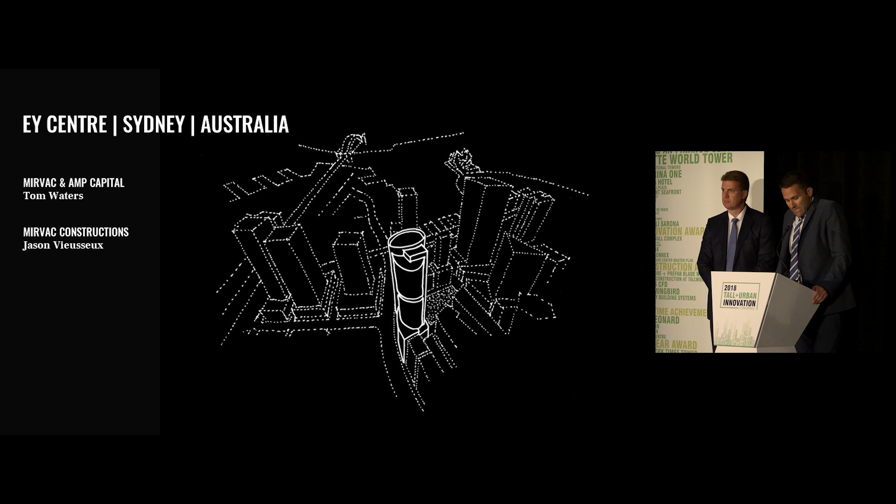I'd like to thank the Council of Tall Buildings and Urban Habitat for hosting the event, but also for recognising the EY Centre in a competition so full of amazing developments. Jason and I are here today to take you through a building we are so very proud of, the EY Centre in Sydney, Australia.

Before we take you on the journey of the EY Centre, I'd like to briefly explain who Mirvac is. Mirvac is an Australian diversified property group. Our primary focus is across office, residential, industrial and retail. We are unique in Australia in that we are the only property group that develops, builds, owns and manages properties across these asset classes. We have an approximate $8.5 billion market capitalisation value. We're publicly listed on the Australian Stock Exchange and have proudly operated in Australia for over 40 years.

Our company was founded on delivering high-quality projects. The concept of quality is as important as ever to us, given we develop, build and then hold on to our assets. The EY Centre is one of these projects and is the jewel in the crown of the 61 major assets that Mirvac Capital own across Australia.

The site of the EY Centre is located in the Circular Quay precinct of Sydney Harbour, one of the most spectacular harbours in the world, and the harbour where the first European settlers weighed anchor and established a colony that would become Sydney.

Interestingly, when you approach the city from the harbour and are facing south, you're greeted with a palette and form which has hard edges, hard material, and is non-personal. Our architect Richard Francis Jones of the firm FJMT says many of our cities are dominated with buildings that resemble unyielding security guards wearing dark suits and reflective sunglasses. They aren't approachable and they certainly aren't personable.

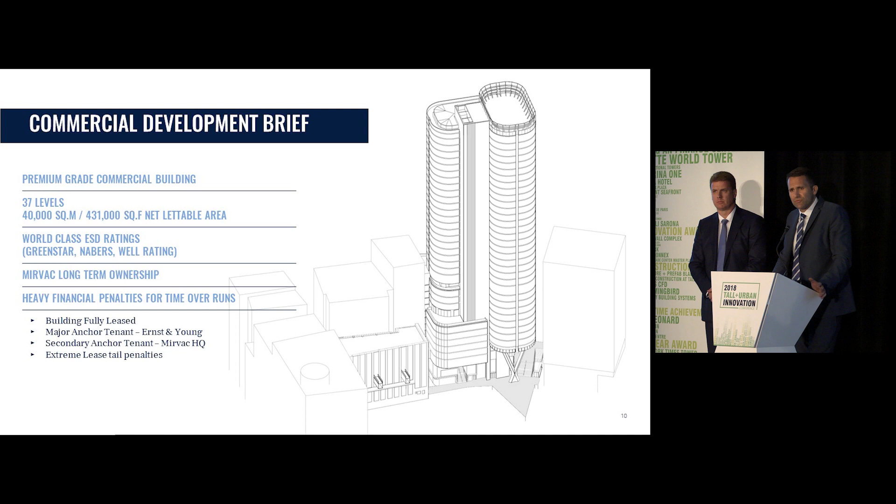And that is why we, as owners, nominated Mirvac Constructions in this category. It wasn't because this building was the biggest—we have height restrictions in the Sydney CBD. It wasn't because it was the fastest—we have working hour restrictions in the CBD.

Mirvac Constructions and the EY Centre were nominated because they delivered a high-rise building more akin to a public piece of art. They did this with craftsmanship and attention to detail in every area, and delivered this artwork within a typical tower duration. This development was delivered in the Mirvac integrated model, bringing the best out of our people across development, design, leasing, and particularly our construction team. I will now hand over to Jason Vieusseux to take you through this artwork on a high-rise scale.

Thank you, Tom, and good afternoon to you all. The brief to Mirvac Constructions was very clear: to reimagine high-rise office as an art form. And we did that through innovation and craftsmanship, but on a high-rise scale.

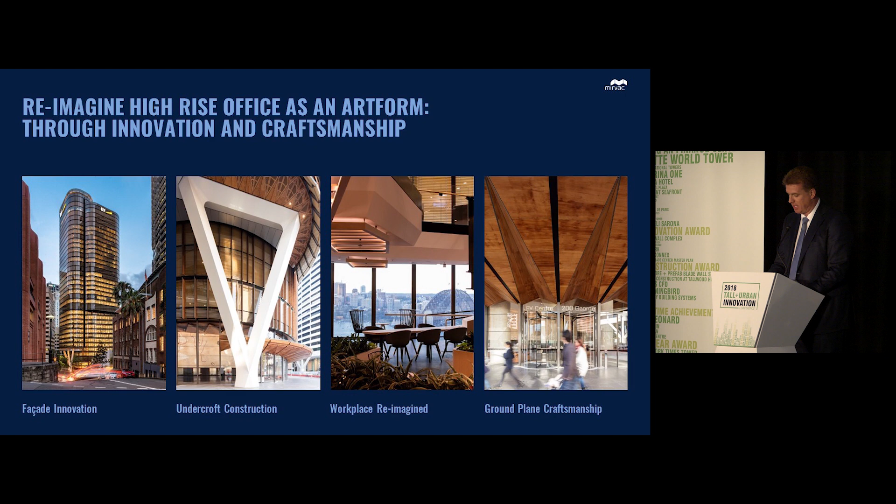The first thing you see at the EY Centre is its iconic high-performance facade. The facade is characterised by a revolutionary use of timber—the first high-rise building in the world to use timber on this scale. There are timber blinds in all of the facade modules, vertical timber fins to the low-rise, and timber-lined mullions throughout the building. And all of this had to be done in Australia, where the climate is hot and presented many challenges in using timber within the facade.

So what is a closed cavity facade, or CCF? CCF is a triple glazed super clear facade consisting of a high transparency DGU to the inner pane and 10mm low iron glass to the outer pane. A conventional mullion depth of 200mm, or just 8 inches, provides a sealed cavity through which is supplied dry dehumidified air, which prevents condensation and the build-up of debris within the cavity. An automated timber blind was used to provide sun shading to the DGU and to prevent glare.

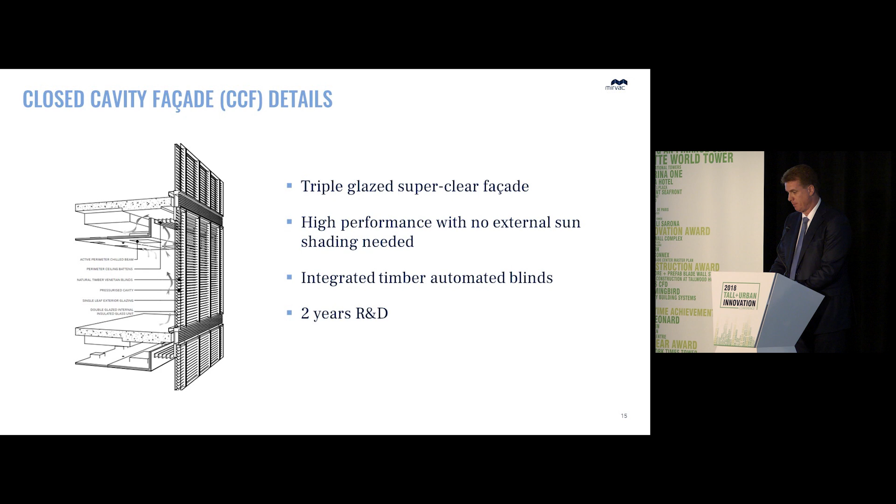Prior to the EY Centre, CCF had only been used on low-rise buildings in Europe and had never been attempted on a high-rise building anywhere in the world. To deliver the CCF, we partnered with international contractor Permasteelisa, and it took us almost two years of exhaustive R&D, which had to be compressed using accelerated testing regimes.

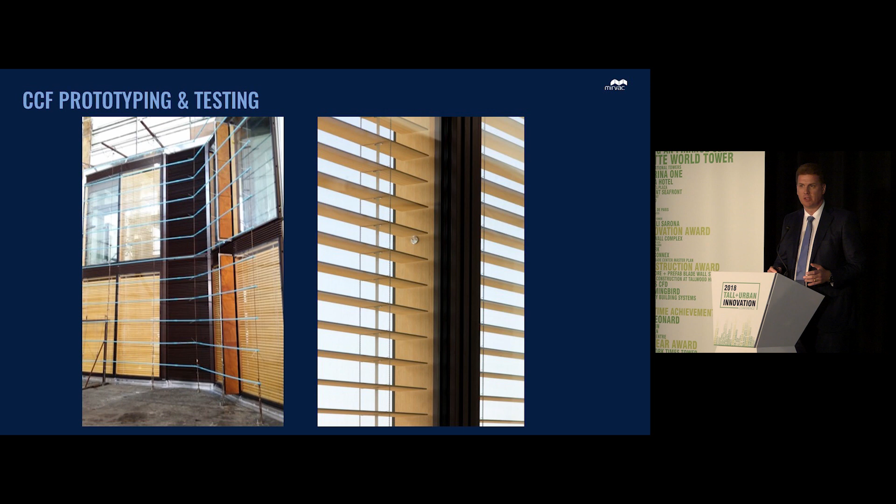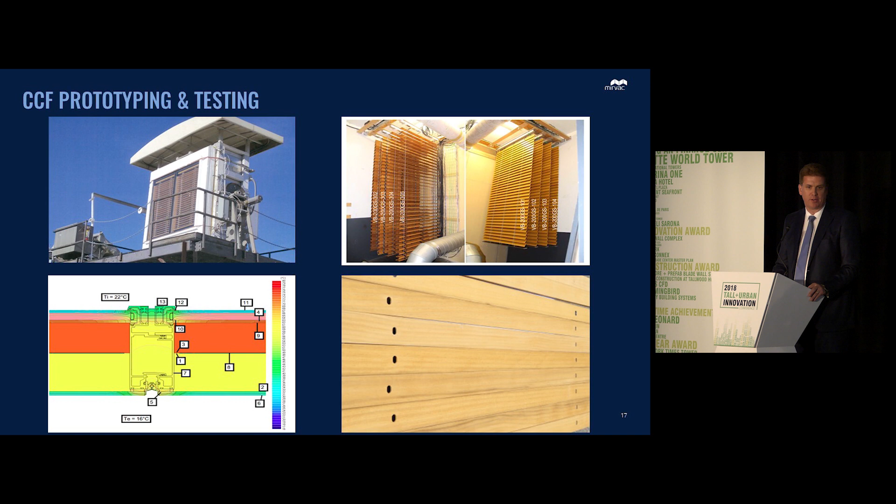These tests were all critical. We had to ensure that the timber could perform inside the cavity where the temperatures can reach up to 100 degrees Celsius.

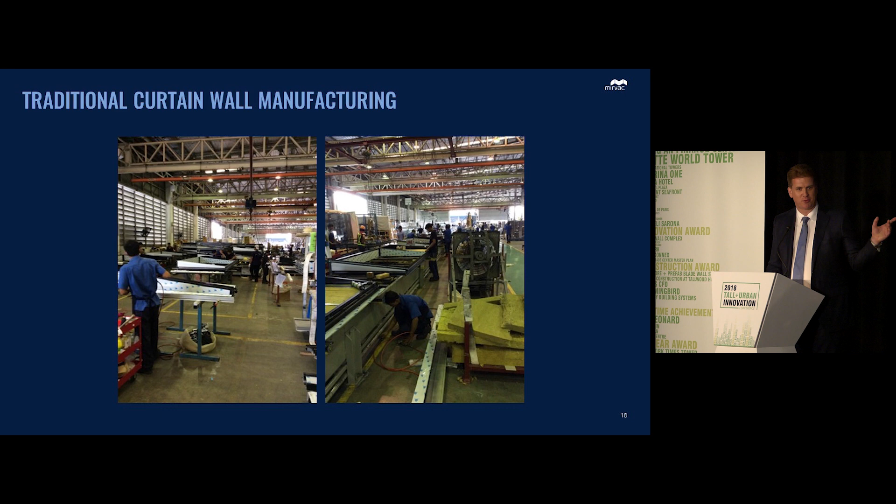The manufacturing of the CCF presented us with the next set of challenges. Put simply, CCF cannot be manufactured in a curtain wall factory like this. Instead, CCF required the construction of a clean room manufacturing facility, and we transformed Permasteelisa's Thailand plant into a highly controlled environment for temperature, humidity and dust—one requiring airlocks on entry, epoxy floors and clean suits. And there was an absolute focus on QA.

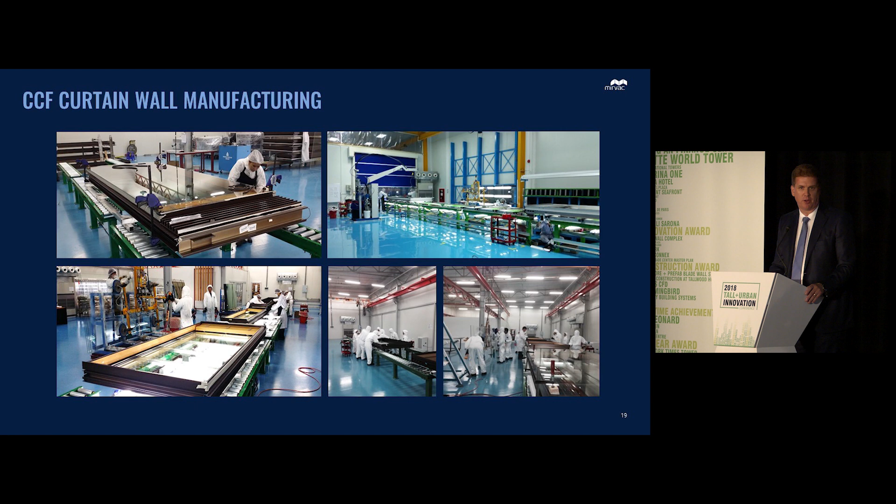The final outcome is a triumph of innovation and craftsmanship in high-rise facade technology. The facade provides a highly advanced environmental skin which maximises daylight penetration, efficiently manages the flow of light and heat across the facade, resulting in significant savings in running costs for our owners, and reduces the overall energy consumption of the building by 26%.

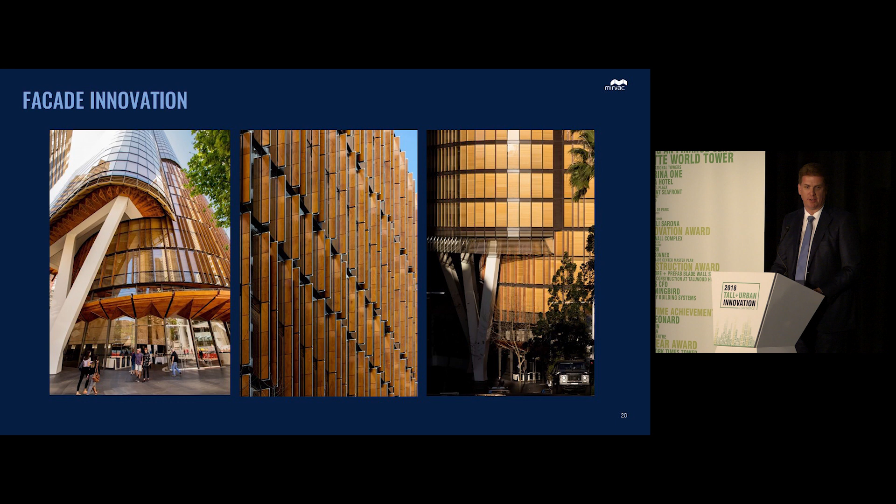The most demanding phase of 200 George Street's construction was the transition from the basement excavation to the bottom of the tower at level 4. We had two key complexities to overcome: constructing a 21-metre high jump steel structure on the northern half of the site, and dealing with a utility easement traversing the southern portion of the site with high voltage distribution cables servicing over 25% of Sydney CBD. In addition, the City of Sydney imposed substantial limitations on how we could build, in particular strict adherence to 10-hour days of work.

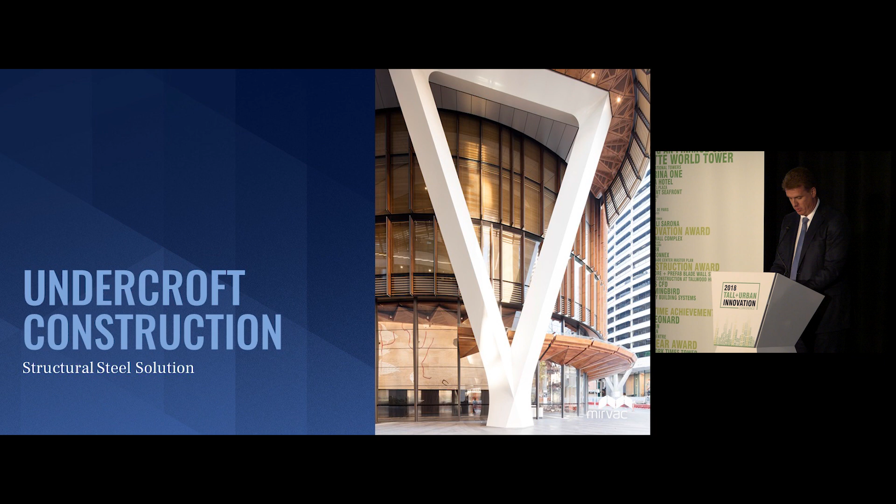The ultimate goal of this phase was to pour level 4 in 2 sequential pours and spring straight into the tower construction.

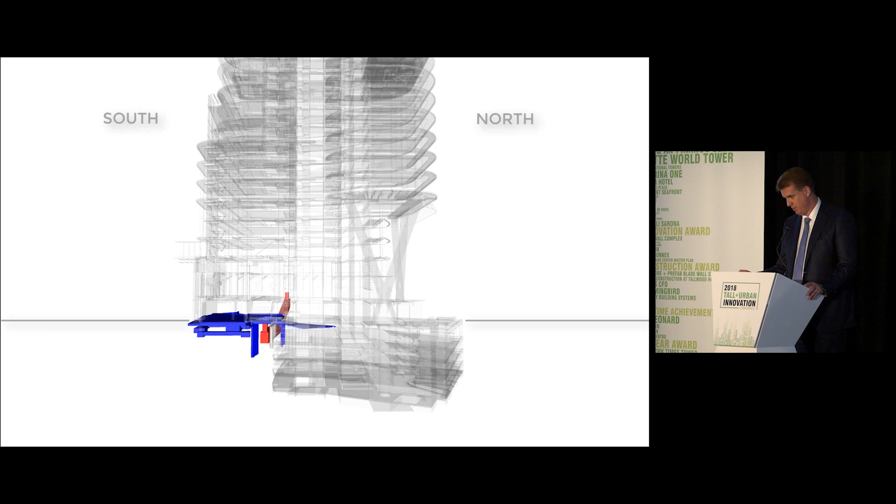And the animation is not going to work for us today.

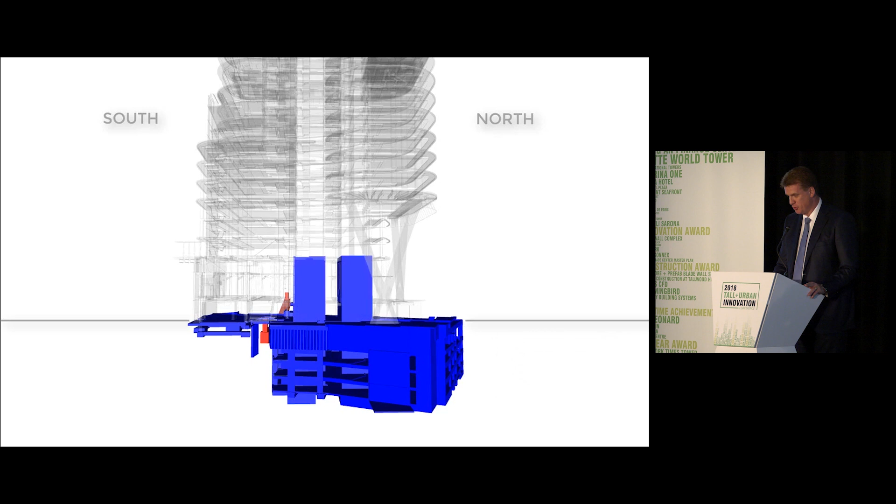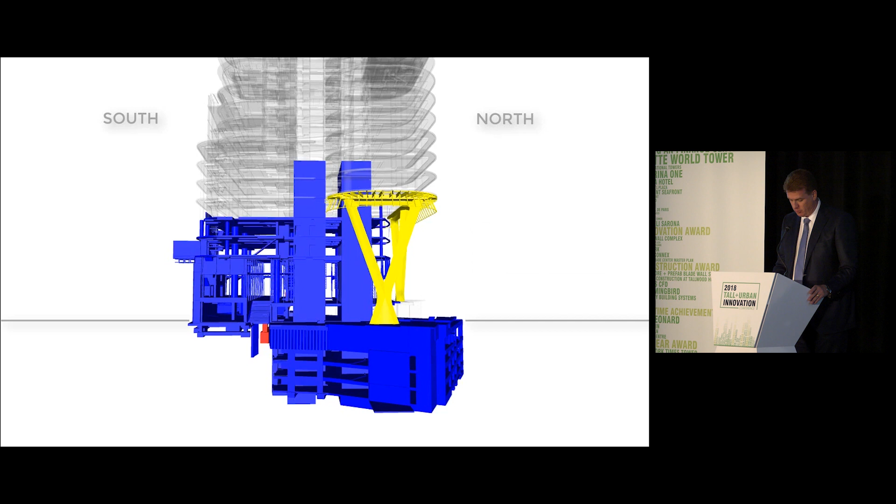So the southern portion contained no excavation due to the high voltage easement, shown in red on the left of the page, and a concrete structure from ground up to level 4. The northern portion contained a concrete structure from basement 3 to ground level and a jump steel structure up to level 4, as you can see in yellow.

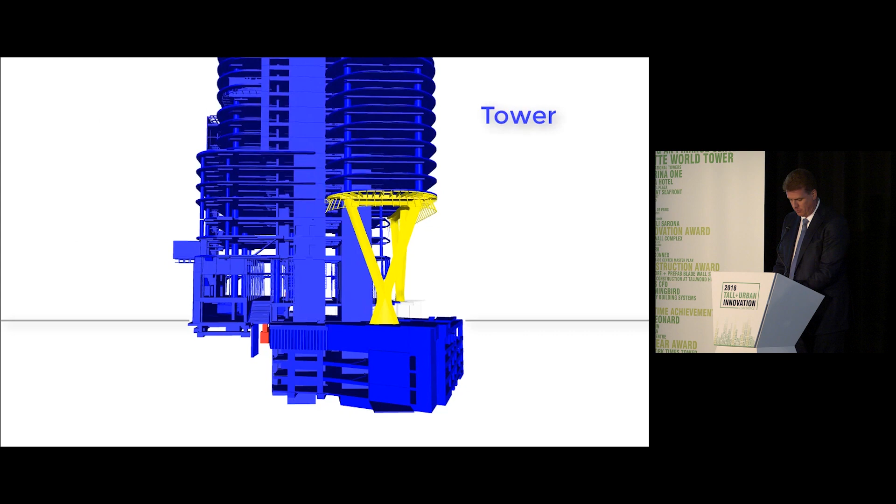This phase was expertly planned and delivered in only 5 months, and the 2 halves of level 4 were poured 2 days apart.

A further complication in the undercroft arose after commercial terms and the project program had been agreed. The simple vertical structure of the original design was replaced by Y-frame structures, and it is these sculpted elements which have come to define the undercroft of the EY Centre. The team knew that the project schedule could not be extended, and an innovative steel solution was found.

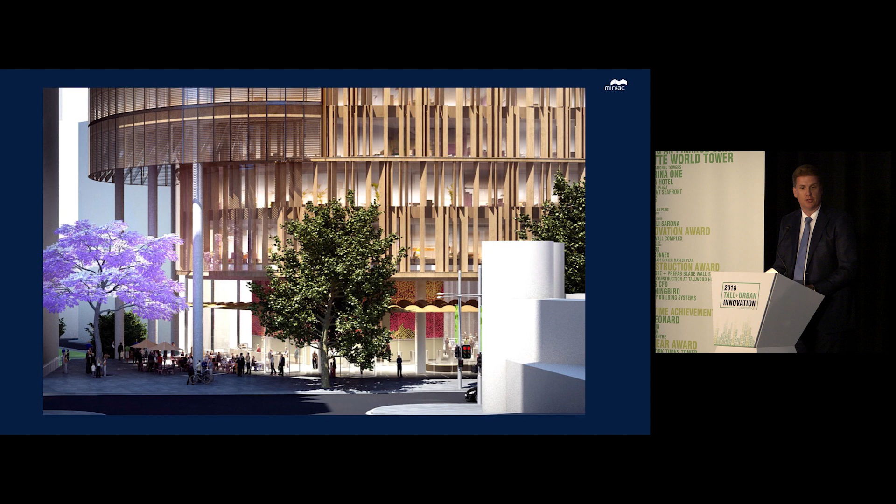We formed a close working relationship with Jinggong Steel International, who manufactured the Y-frames for us in Shaoxing, China.

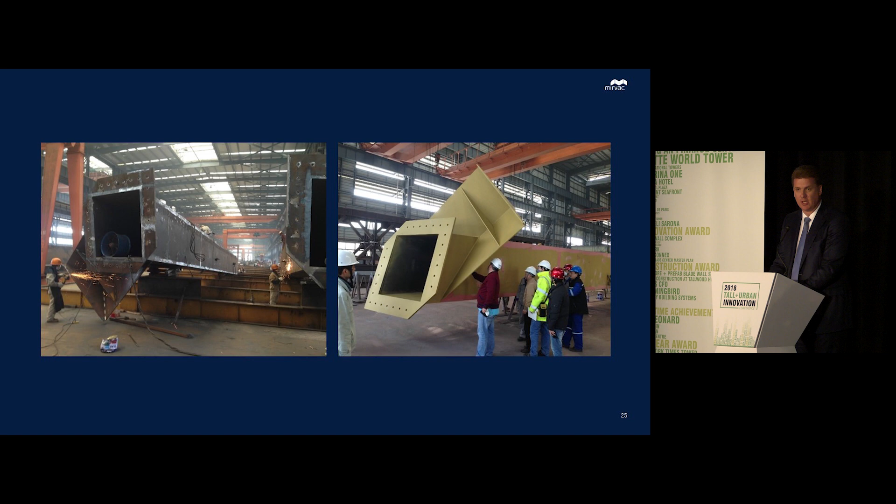These 135-tonne elements each consist of a 7-metre high node, 2 18-metre struts and a 20-metre long trilateral beam. Strict adherence to Australian material and fabrication standards, as well as American welding standards, ensured a high-quality architectural product was produced.

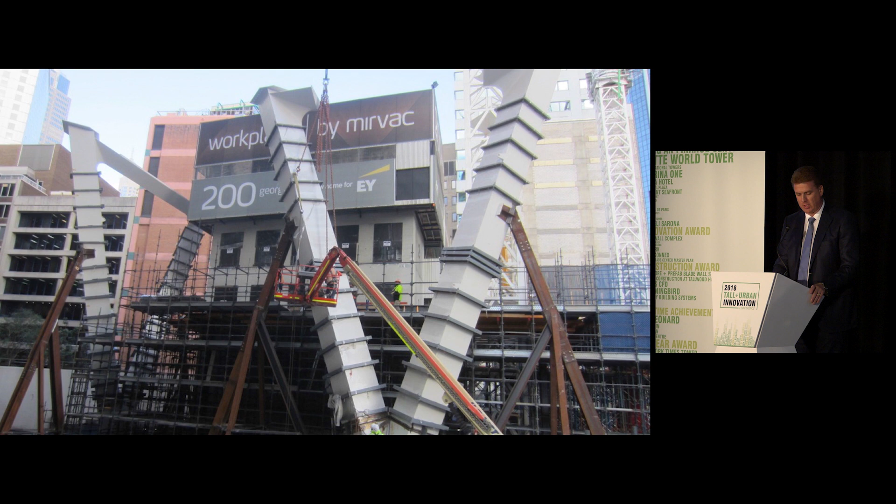The erection of the Y-frames commenced at ground floor with the installation of prefabricated reinforcing cages, and the nodes were then encased with 2 35mm plate steel shells, each curved in 2 directions and welded together continuously on site. The 40-tonne struts were supported on temporary steelwork.

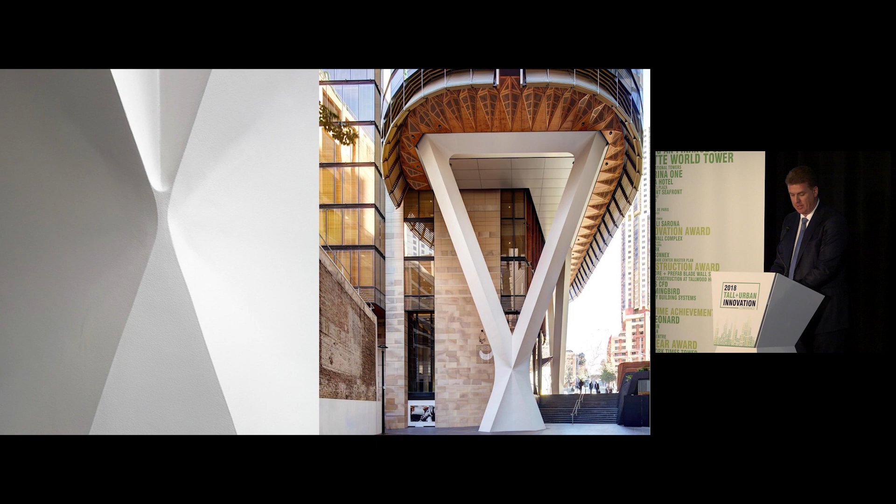Each Y-frame was filled from its base with 100 MPa concrete in a continuous pour, and then the final steel for level 4 was tied back to the core. Despite the challenges of this exacting design, the undercroft was delivered ahead of schedule and to an extraordinarily high level of finish, particularly for such significant structural elements.

Mirvac Construction was also engaged to deliver 2 significant workplaces at 200 George: the Oceania headquarters of global firm EY, and Mirvac Group's own headquarters. But both organisations had looming expiry dates, which meant we couldn't use conventional shell and core models. Instead, we used an integrated fit-out model whereby the workplace finishes, the workstations and all the FF&E were delivered concurrently with the base building.

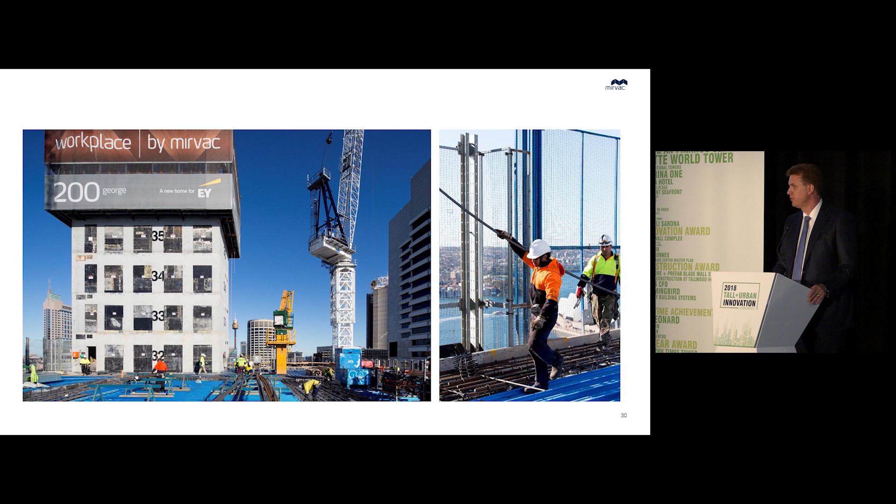The construction of the tower up to level 38 was delivered using conventional techniques: reinforced concrete cores, banded post-tension slabs, and the unitised facade. But we knew we had to achieve 5-day cycles for both the structure and the facade to allow services rough-in and the fit-out works to commence immediately behind the facade.

The installation of building services is always a key program item, and we conceived a clever solution to allow this to commence as early as possible in the low-rise. Adjacent to the EY Centre is an underutilised building that Mirvac also owned, a 10-storey former telco, and we repurposed that building and delivered over 90% of the services for the tower building from it.

By executing this strategy, we were able to hand over 225,000 square feet to EY for early occupation, some 4 months ahead of project completion.

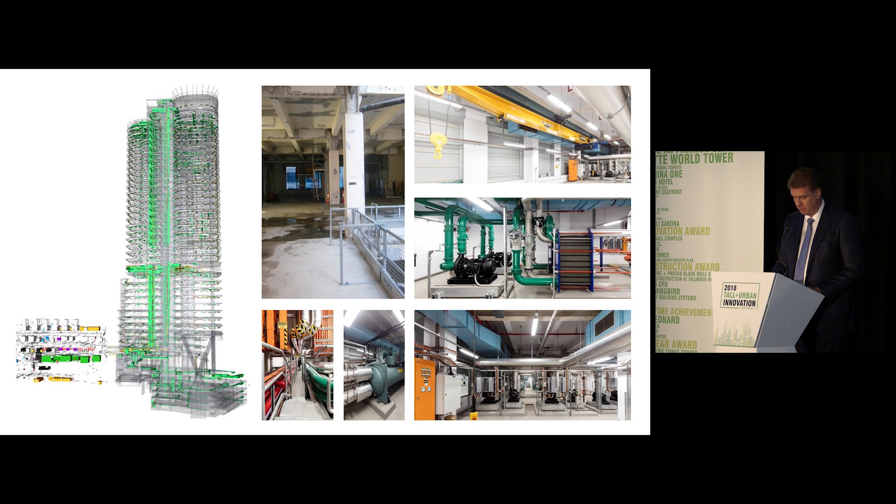The vision for Mirvac's new headquarters was to create a bespoke workplace. As with the building envelope, the specification internally was incredibly ambitious given the tight constraints of the budget.

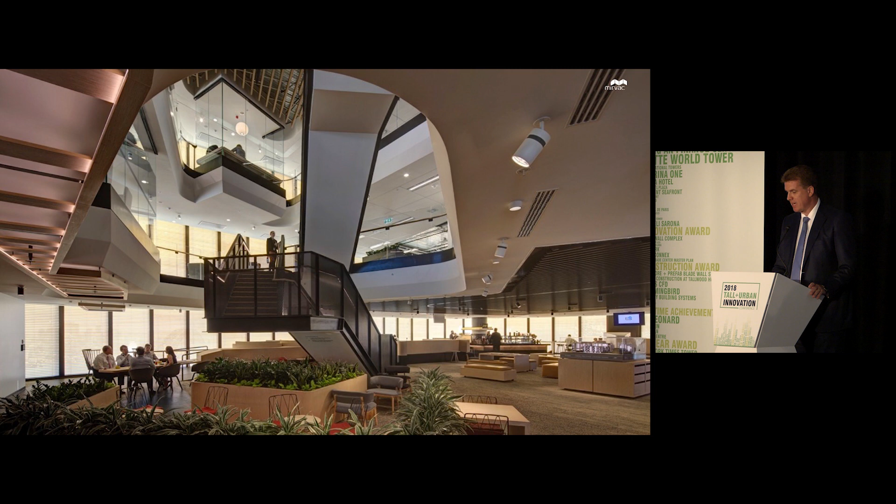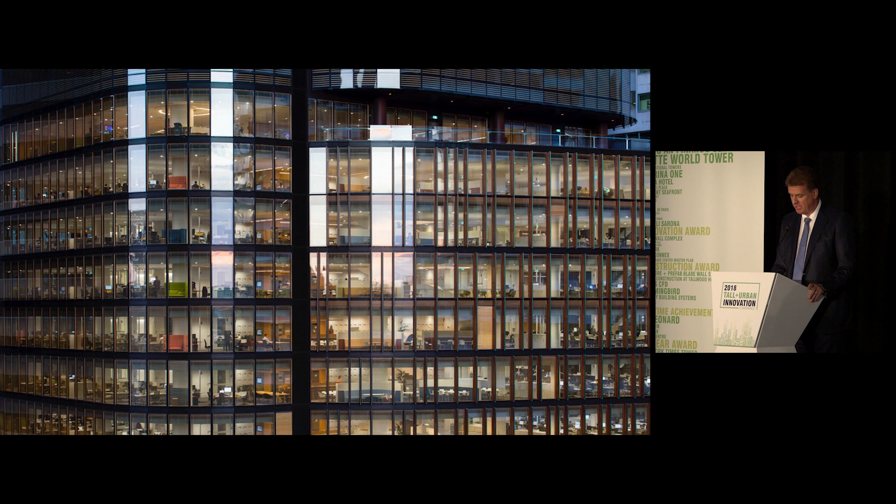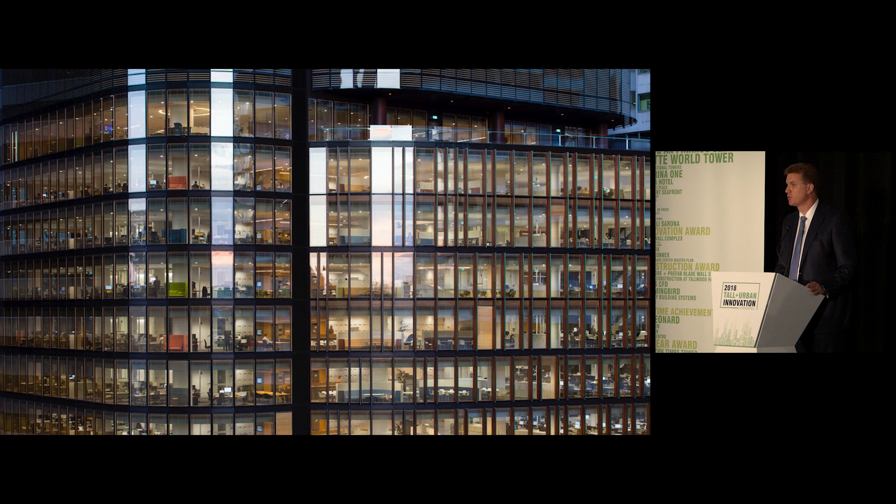This exacting level of quality can be seen throughout the building, in the breakout spaces, inside the amenities offered on each floor, and even in the 17 lift cars. Since commencing operation, the EY Centre has exceeded its sustainability targets. The building has a 6-star as-built Green Star rating and a 6-star NABERS rating, each the highest ratings. It is the first building in Australia to be fully lit by LED lighting, saving over 30% of lighting energy consumption, and is the first building in Australia to achieve a Gold WELL rating, which recognises best practice in workplace outcomes for the building's occupants.

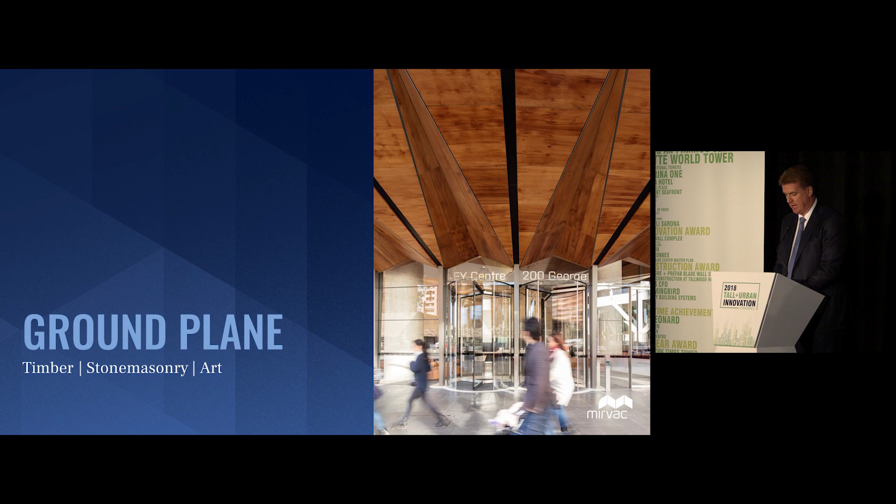One of the most important aspects of any high-rise is its connection to place. Too often, high-rise buildings are alienating and hard to engage with. The vision for the EY Centre was to use natural materials, timber and stone, to provide a more human experience at the ground plane. The design consisted of over 500 panels of shaped glass, nearly 2,000 CNC routed timber panels, radius cut paving, and a stunning piece of art.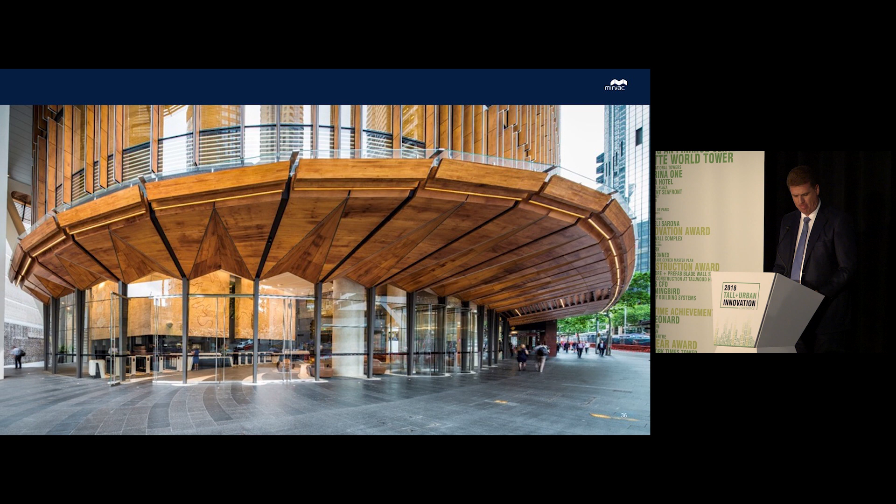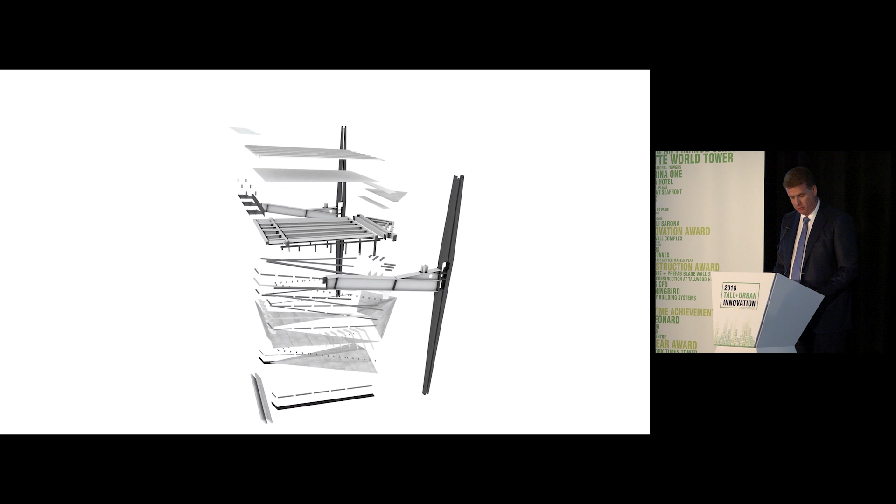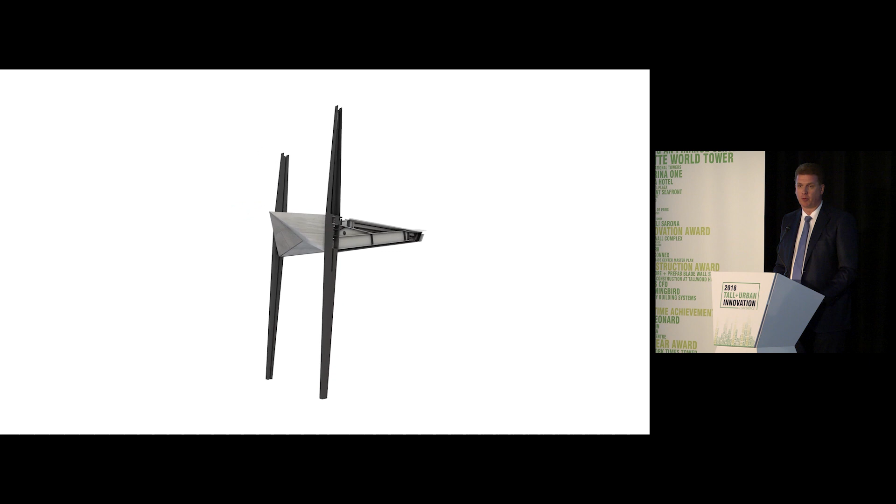In order to construct these complex elements, we embraced digitised construction and design for manufacture and assembly, or DFMA. We collaborated closely with an architectural firm named Armour, who specialise in DFMA, and they produce advanced parametric models that provide a comprehensive virtual design and construction database. This model was used to produce all of our details and fabrication files and allowed for real-time feedback on cost, buildability and manufacturing. It changed the way we designed our connections, dealt with site tolerances, and allowed us to minimise material wastage.

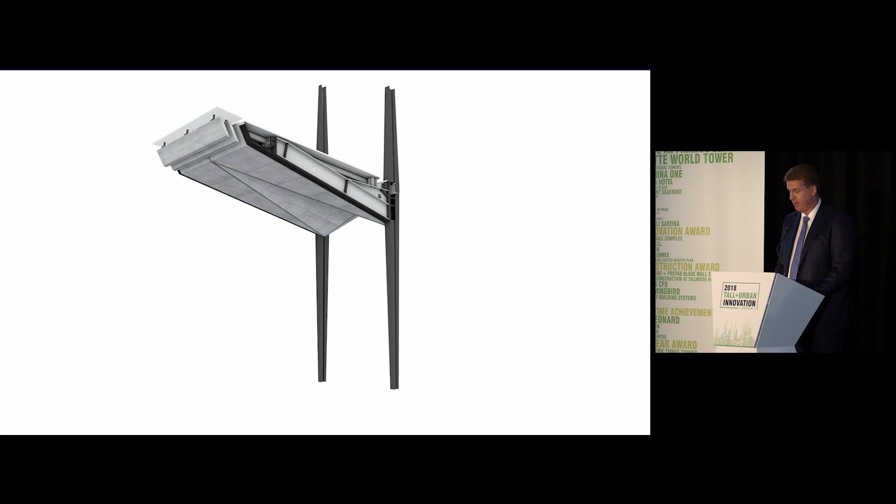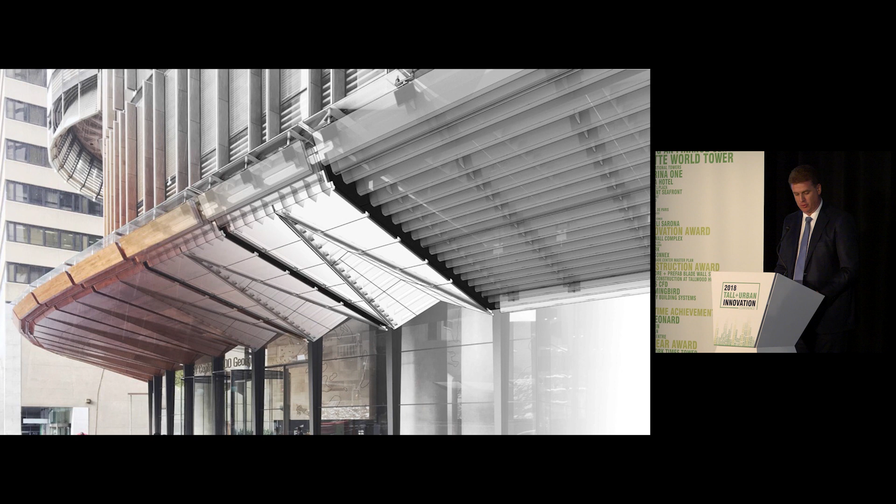The adoption of digitised construction and automated manufacturing allowed us to deliver the highest levels of craftsmanship without adding any additional time to the project schedule. These techniques we also used to deliver the complex timber facades in the undercroft and also the lobby ceilings.

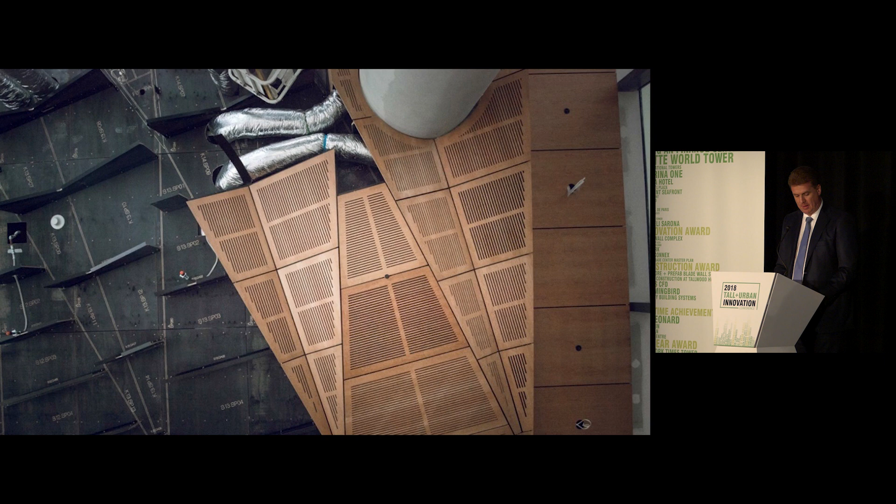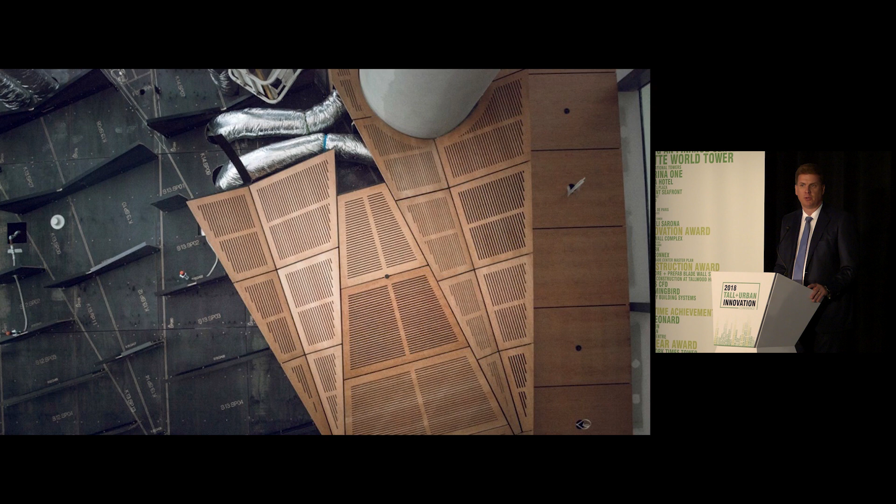Following the installation of a datum ceiling and framing ribs, the triangular prefabricated panels, each unique in their geometry, were rapidly installed to millimetre precision. And the result is breathtaking, both in its architectural form and because of the simplicity of the construction on site.

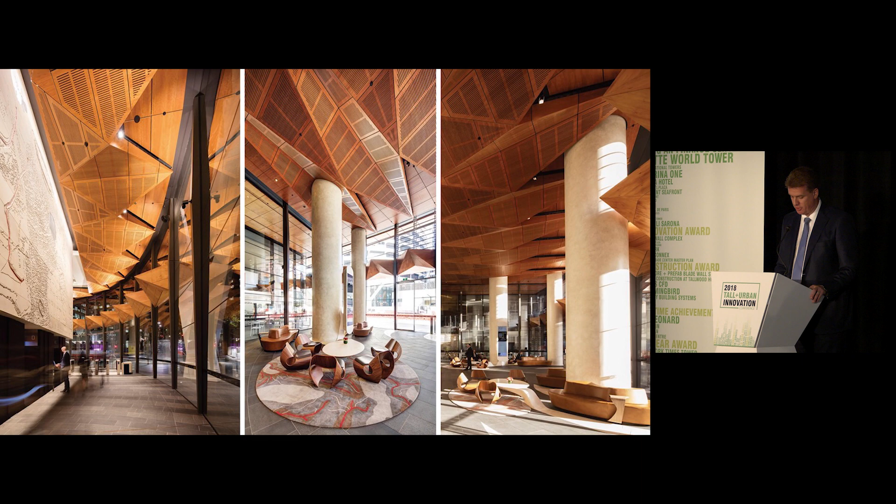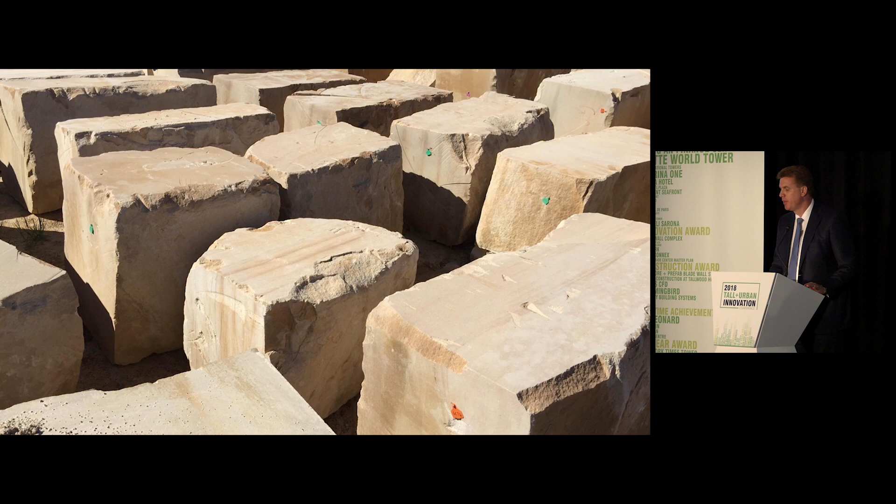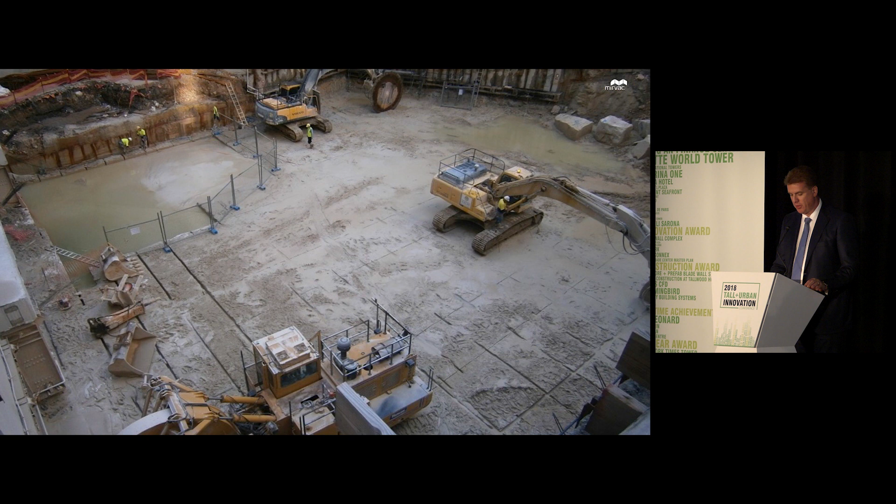However, the dominant feature of the main lobby is the sandstone artwork. Early geotechnical investigations identified large deposits of Sydney sandstone, or what we call yellow block, which is a highly sought-after stone due to its rareness and consistent appearance. It's synonymous with many of Sydney's most significant historical buildings. Almost 2,000 cubic metres of yellow block was literally quarried from the site, a real challenge given that the rock strength is up to 100 MPa.

Much of it was gifted back to the City of Sydney, but we kept some additional quantities for ourselves at the EY Centre. And it's the presence of the yellow block which presented us with a unique opportunity to craft one of the building's greatest features.

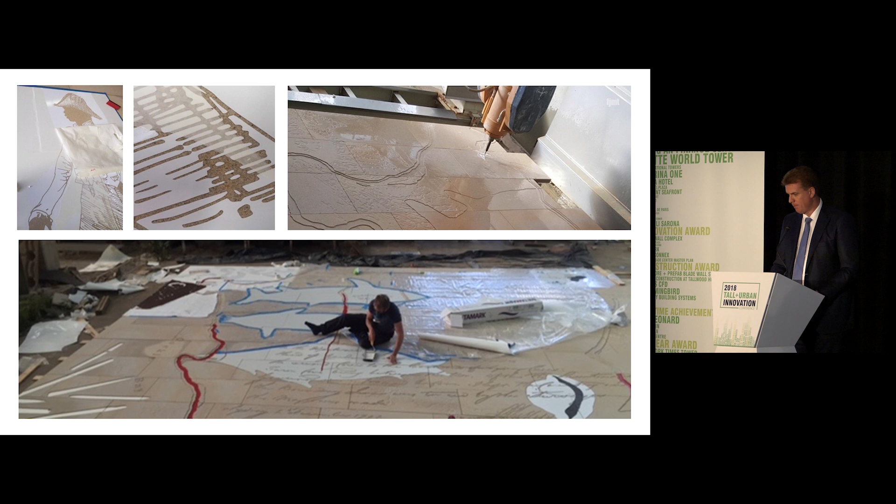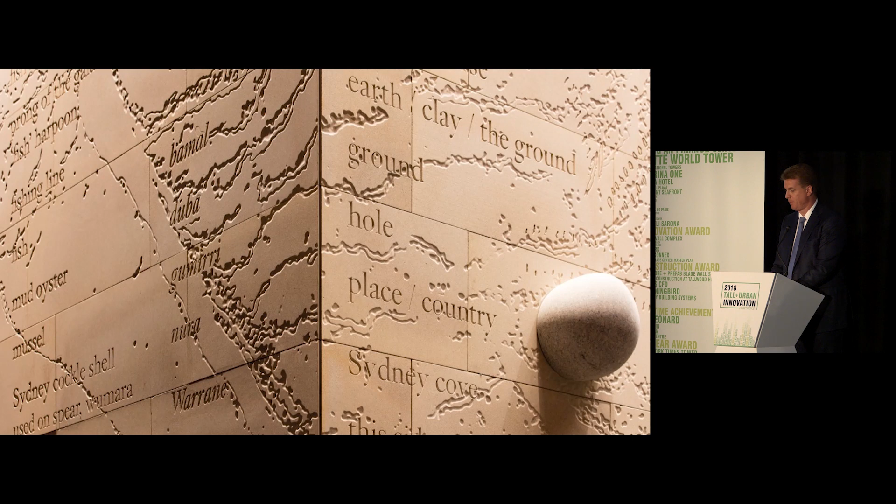A 300 square metre masterpiece was completed by well-known Indigenous artist Judy Watson. This incredible piece of art includes early maps of the outline of Sydney Harbour, engraved by 3D routing, as well as artefacts and Indigenous texts imprinted and carved into the sandstone. The result is a fabulous piece of art which is permanently on display for all Sydney-siders to enjoy.

The image that greets you when you enter the lobby at the EY Centre symbolises everything we at Mirvac set out to achieve. It showcases stunning craftsmanship and natural materials born of the site. It provides its occupants with an enriched workplace experience each and every day. And we did this using innovative construction techniques, some of which hadn't been used anywhere in the world in high-rise construction.

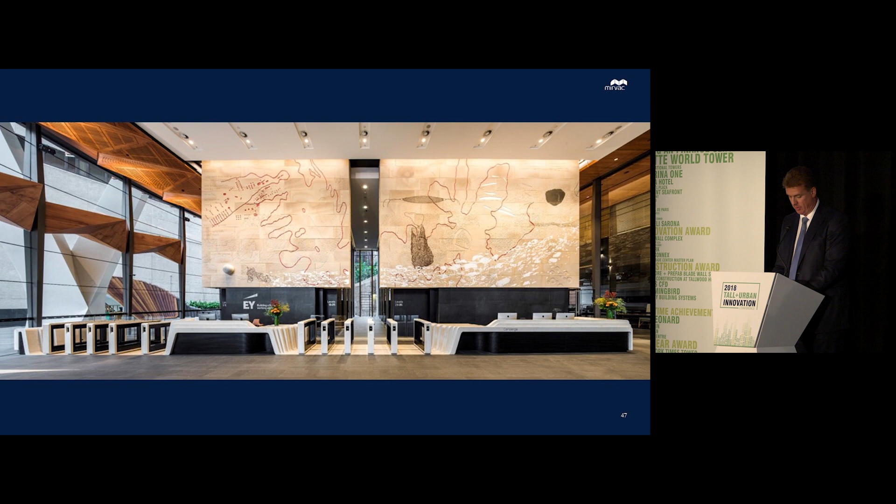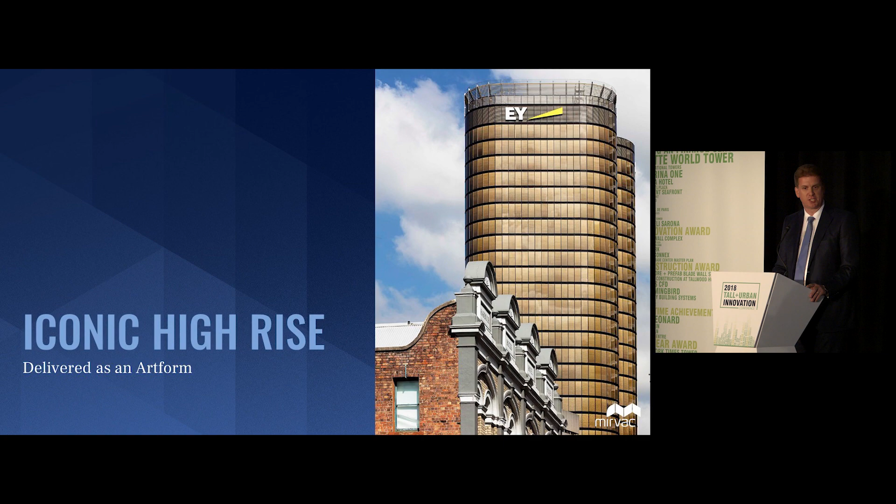In closing, we at Mirvac are incredibly proud of the EY Centre. It is the jewel in the crown of our property trust. It brought out the best in our people, and it sets new benchmarks for facade technology, workplace design and urban habitat. If you are ever in Sydney, please seek us out.